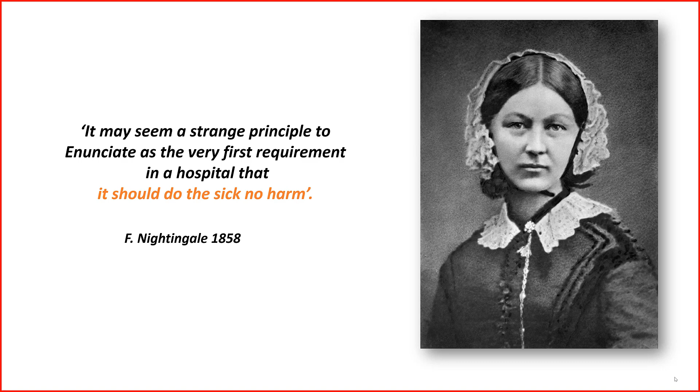Florence Nightingale is credited as being the first person to make the link between the hospital built environment and patient ill health. What she said so eloquently more than 160 years ago is still true today, unfortunately. Within days of opening of a new hospital, patients die from avoidable infections from the built environment.

It might be reassuring to think that when you've got a brand new hospital, this is like a fortress. Or you may think that once you put a patient in an isolation room and the door is shut, they're not at risk of acquiring infections. But this is not the case. And the problem doesn't just begin elsewhere in the hospital. In fact, it begins several miles away, or even further, depending on local circumstances where the hospital is built.

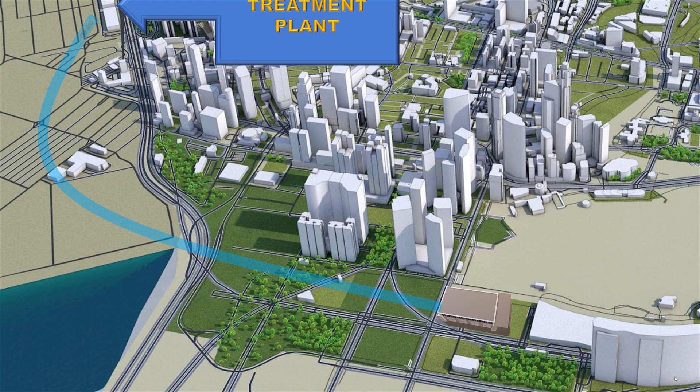Now, if we go to the water treatment plant, which may be the other side of a city, water is piped, normally through underground pipes, into buildings, and the water contains its own normal microbial flora. These are termed opportunistic premise plumbing pathogens. These organisms are capable of causing disease, especially if they multiply up to high numbers. But in immunocompromised patients, these organisms will cause infections.

Equally, patients, staff and visitors bring organisms into a building. The large bowel of humans contains more bacteria than there are people on the planet or cells in your body. And this is where some of the most highly antibiotic resistant organisms reside, in the human gut. So naturally, as people enter a hospital, they will bring their own microbial flora, which may contain highly resistant organisms, and these may then enter the systems in the hospital.

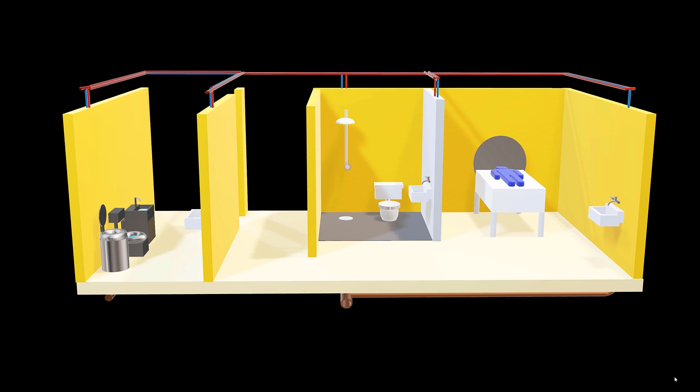So if we go back to outside the isolation room, if we look at the flooring and make this transparent and look underneath, we can see the pipework. This will include the hot and cold water systems, but also the wastewater systems. And these will bring microbes into the patient's room, which may produce infection. This talk primarily concerns the risks from wastewater systems. We've just overlaid on that the ward. So this is the water pipes, and underneath you can see the wastewater pipes.

The Victorians thought that disease was spread through the air, and because of this, they ordered the cesspits to empty into the Thames. Up to then, the Thames had been a relatively safe source of drinking water, and of course when the cesspits entered it, it became contaminated. As somebody wrote at the time, with the present system of London water supply, a portion of the inhabitants are made to consume a portion of their own excrement, and moreover to pay for the privilege.

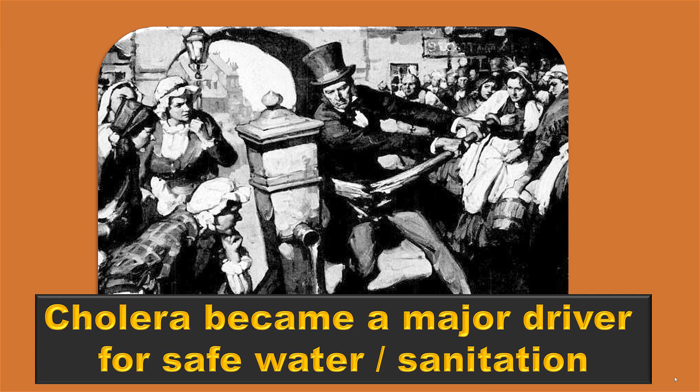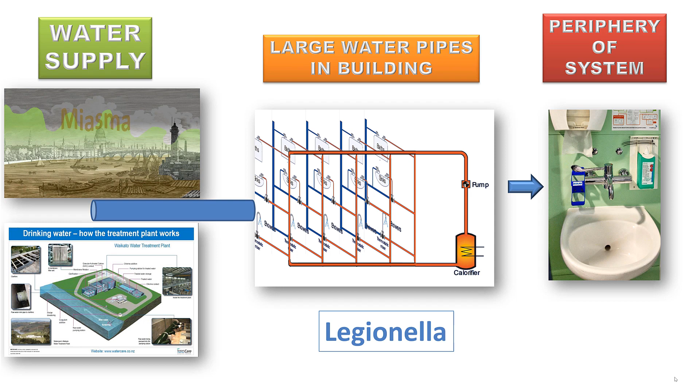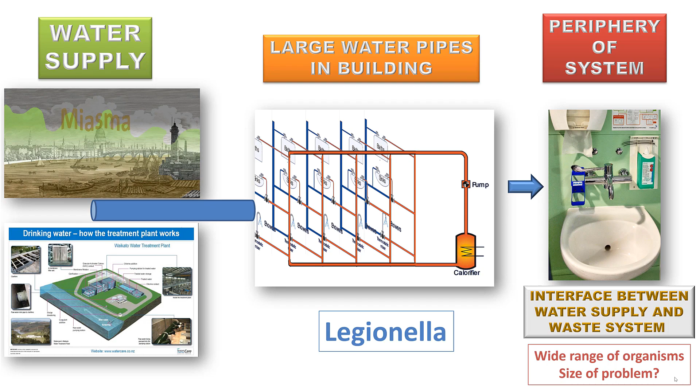So we've moved from fecally contaminated wastewater. We now have, in developed countries, we're lucky, high quality water. We pump that into buildings, and we learnt about Legionella. And we're now only beginning to recognise the risks from the periphery of the water system, which may be arbitrarily defined as the last 2 metres of pipework, connected devices and associated wastewater system. So this is an interface between the water and wastewater system, and there's a wide range of organisms, and I think we need to start thinking what the size of the problem is originating from the periphery.

The first area in the hospital to move to water-free care was not a patient area, but a sterile area, a sterile production area in pharmacy. This resulted because in 1995, total parenteral nutrition was prepared. It was given to paediatric patients, and they died from infection. This was traced back to splashing from a nearby sink getting into the TPN as it was made.

So the view from the sterile services in pharmacy is that water is so unsafe, you keep it out of the department. People decontaminate their hands before entering or use alcohol gel. If you look at most buildings, they are connected to the wastewater system. And if you were an alien and you wanted to sneak into people's houses and it was small enough, you could do it from the wastewater system.

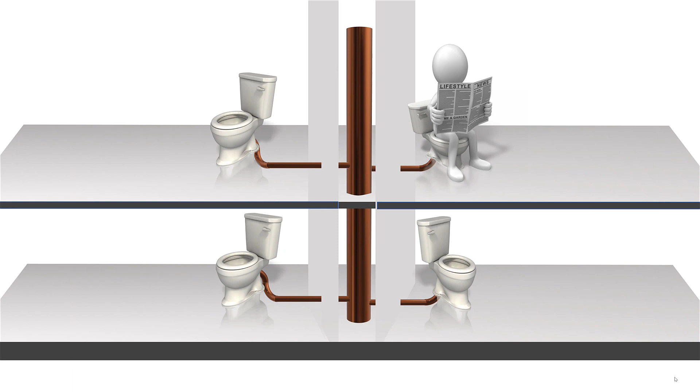But what we're going to concentrate on is the wastewater systems in hospitals. As we would expect, if we looked in the main sewage stack, we will find human feces and other body fluids. And as we've already stated, this is where some of the most highly antibiotic resistant organisms reside, which threaten the end of the antibiotic era.

So the question is, these are 4 patients in geographically distinct areas of the hospital. If one has a highly antibiotic resistant organism, how is it that it may be communicated to others in quite distinct areas? And could the answer be it is actually via the wastewater system?

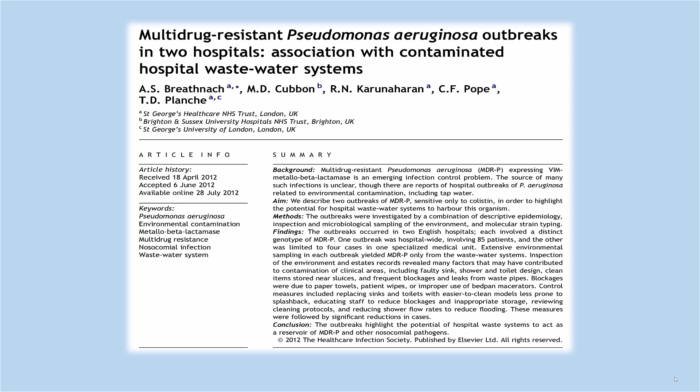So how do organisms move around wastewater systems? This is a wonderful paper that came out of St George's in 2012. It took 5 years to uncover the outbreak, and they showed that the wastewater system acted as a superhighway for the spread of highly antibiotic resistant organisms through a healthcare facility. These were emerging at blocked sinks, blocked showers, anywhere where drains were blocked or poorly constructed, 90-degree bends.

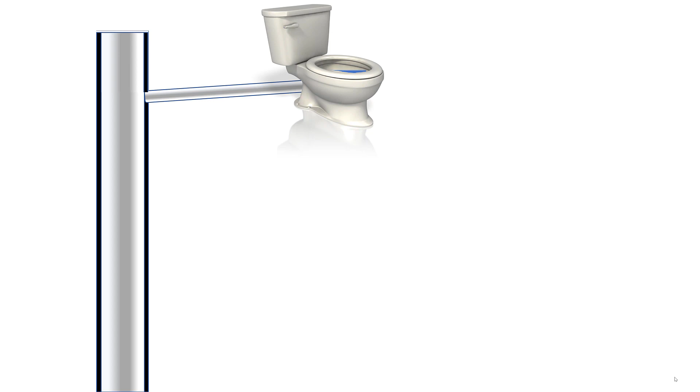So what happens when you flush a toilet? As you might expect, the water and feces enter the main sewage stack, and you expect them to fall by gravity towards the ground. This is the case, but as this falls, air has to escape, which creates an upward draft, which creates a suspension of water and fecal material, which can travel several stories up.

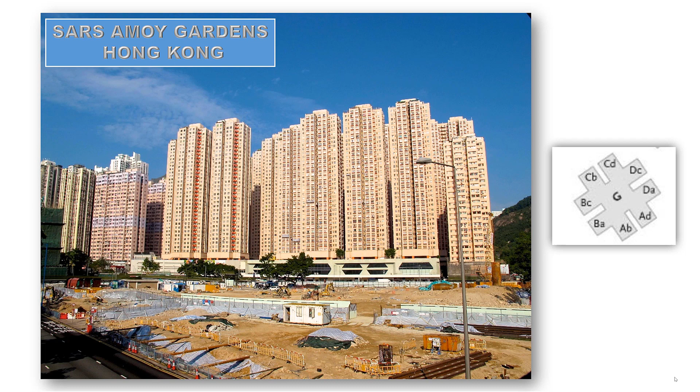The first clue to this came in the first outbreak of SARS. There was an immunocompromised patient, and these patients can shed the virus, still biologically active, in the stool for a prolonged period of time. They were living in these high-rise flats. There are several flats on the same floor, and you might have expected that if there was transmission in the building, it would be people on the same floor who would be using the same services, the lift. However, this was not the case. It spread vertically, and was thought to be via the wastewater systems.

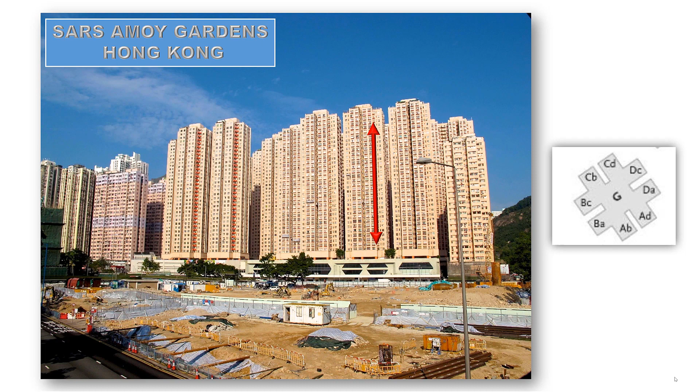So they did the equivalent of flushing the toilet, put the Pseudomonas putida in the stack, and they could show that the Pseudomonas putida could be detected several stories higher, either by air sampling or contact plates on the toilet, showing that these organisms can move up a vertical stack. And of course, within a building, all services are connected to the sewage stack, be they the kitchen sink, your bathroom sink, shower, or the toilet.

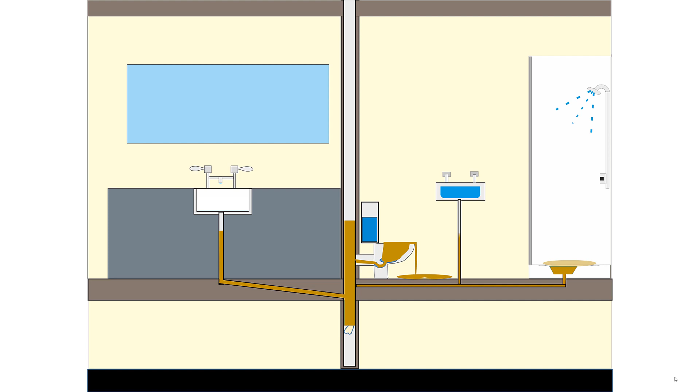Blockages in hospitals are common. Wipes are a common cause of these blockages. In some hospitals, more than 400 blockages a year. And when this happens, you can see how you can get back contamination, and you may see feces actually emerging in showers. But on top of this, we pour still biologically active antibiotics into the wastewater systems.

A recent study in Germany looked at the concentration of antibiotics in the waste traps of showers, sinks and toilets, and they found biologically active antibiotic. People do pass urine when they're in the shower. So they flushed the services out, which should have got rid of the antibiotic, and took the room out of action. What they found is that the antibiotics reaccumulated, and what they think was happening is that some of these antibiotics become incorporated into the matrix of the biofilm.

When you flush the water away, the concentration lowers, so these antibiotics now re-emerge out of the matrix. But it's not a great leap of faith to see how the microbes may now be using our own weapons against us. So by incorporating a broad spectrum antibiotic into the matrix of the biofilm, they now may apply a selective pressure, only allowing resistant organisms to enter the biofilm.

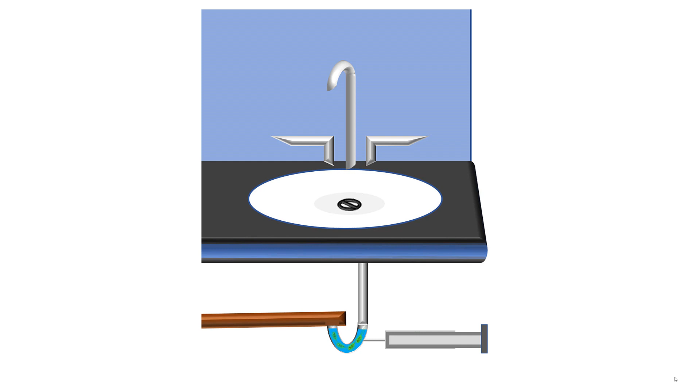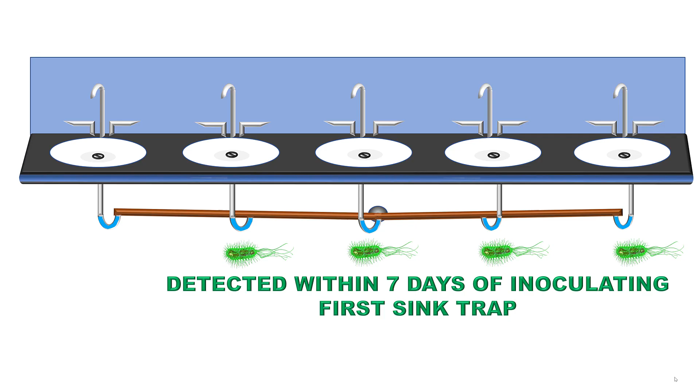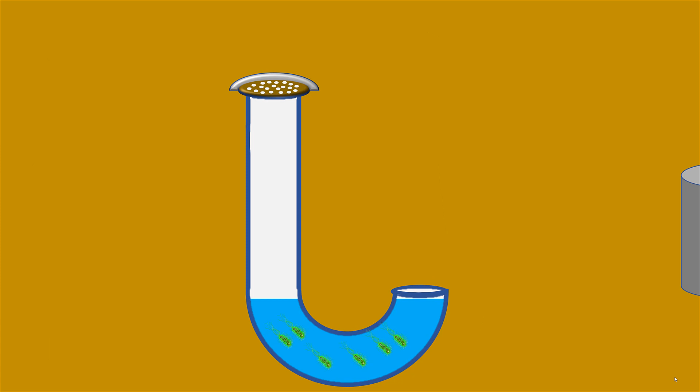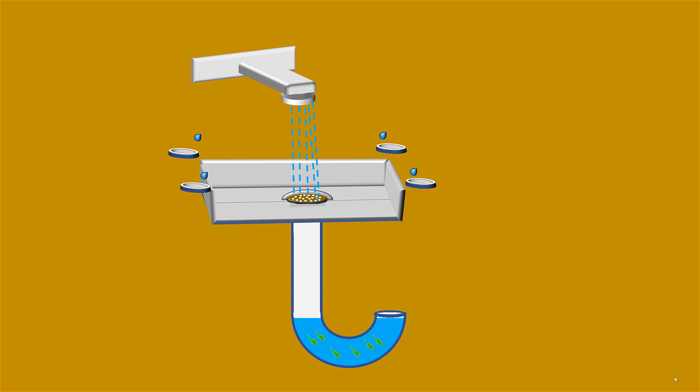So waste traps, their main function is they act as a water seal to prevent the escape of sewer gases, and these come in various forms, including here, a bottle trap. Again, the same group in America inoculated a waste trap with a bacterial culture. They then put this into a high-risk scenario. So this was a sink where water from the outlet was directly hitting the sieve. They put settle plates, bacterial agar plates, nearby, and they collected splashes, but they couldn't detect any bacteria.

But they then repeated the experiment and made one minor change, and this was to add a carbon source. And something quite remarkable happens when you add a carbon source. Bacteria in the form of biofilm now grow up the vertical section of the pipework at an incredible rate of 1 millimetre an hour. If you now put this waste trap into the same scenario and allow water to directly hit the drain, then on the agar plates nearby, the transfer of the organisms from splashes can now be detected.

So the learning from this is don't pour anything down the sink. It's a zoo down there, so don't feed the animals.

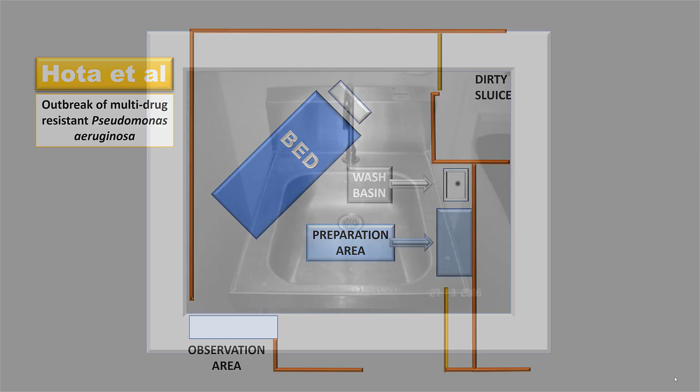Many of the outbreaks are from around water and wastewater with highly antibiotic resistant organisms. This is an outbreak from Canada, and this was a multi-drug resistant strain of Pseudomonas. And if we just go into the ITU, there's a door opening, and then you can see the wash basin and a work preparation area. And what they found is when they tested the water, this was free of the highly resistant strain, but it could be found in the drain.

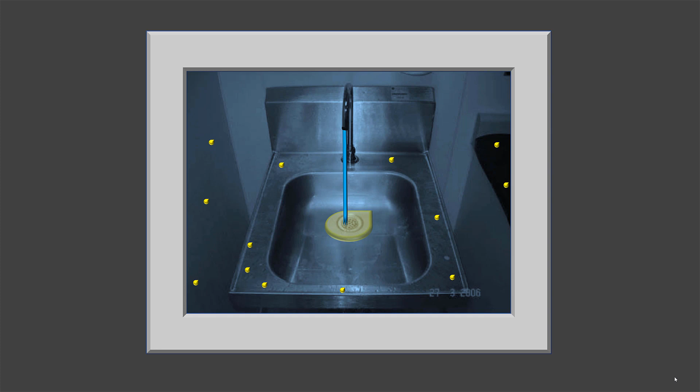So they did a very simple and elegant experiment. They put fluorescein dye into the drain, as shown. They then shone fluorescent light to make sure there wasn't any background fluorescence, and they then ran the outlet. And what they could find is splashes of fluorescein travelling at least a metre away. They couldn't exclude it going any further.

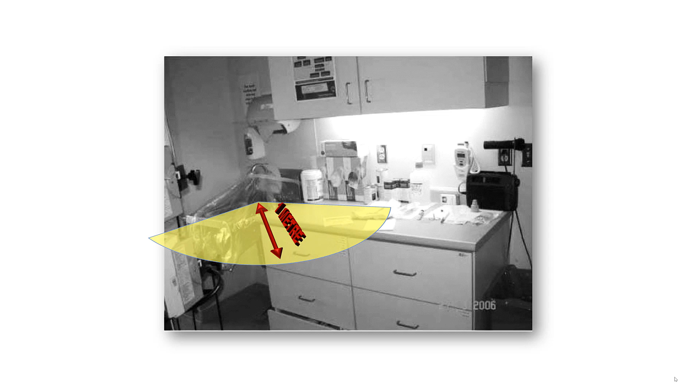We're now in the ITU room. You can see the sink's been taken out of action, and that's probably less than a metre there. We can now see how splashes of the organism would get into the preparation area and go from there to infect the patient.

So now when you look at a clinical hand wash station or any sink, what you're actually looking at is a rocket launcher. This is a piece of equipment which is capable of dispersing either organisms which come out of the outlet in the water, or that the water picks up from the wastewater system. And this might seem to be an exaggeration, but it isn't. Hand wash sinks used incorrectly, any sink, actually result in patients' infections and deaths.

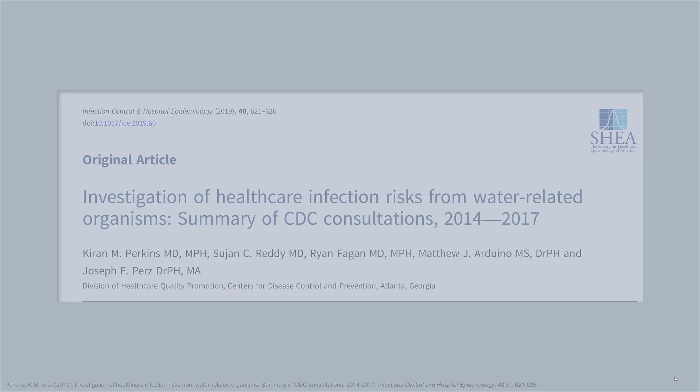This is a report from CDC in America. This is looking over 3 years. CDC are called in by hospitals when they need help in investigating an outbreak. And this is looking at water-related outbreaks, excluding Legionella. So they looked at direct or indirect contact with water, that could be introduced by drugs, looked at susceptible populations, and they included wastewater systems.

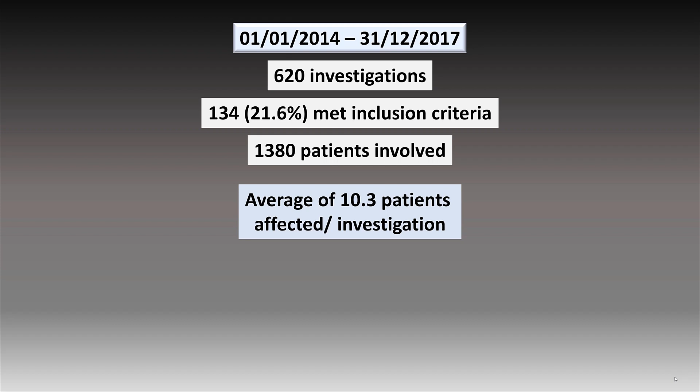So over that period of time there were 620 investigations, but water or wastewater accounted for more than a fifth of their requests for help. There were 1,380 patients involved, an average of 10.3 patients affected per investigation. Just to put this in comparison to Legionella, in England approximately 12 cases of hospital-acquired Legionella a year are detected.

7.5% of investigations were polymicrobial, and a third of infections were with multi-drug resistant organisms. And actually, if you look at the ones caused by Enterobacteriaceae and Pseudomonas, of those organisms, a much higher percentage were due to multi-drug resistant organisms, over 90%.

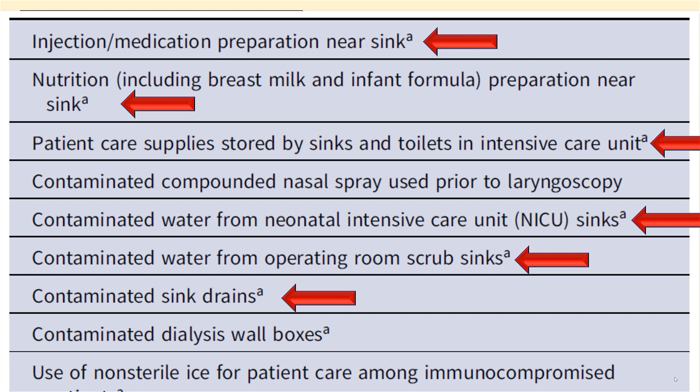And what they found is quite startling. They found that the infections were being transmitted due to preparation of medication near a sink, nutrition near a sink, patient care supplies stored by sinks and toilets in ITUs, contaminated water from sinks in neonatal units, and contaminated sink drains. Well, you might think, okay, that's America, how about the UK?

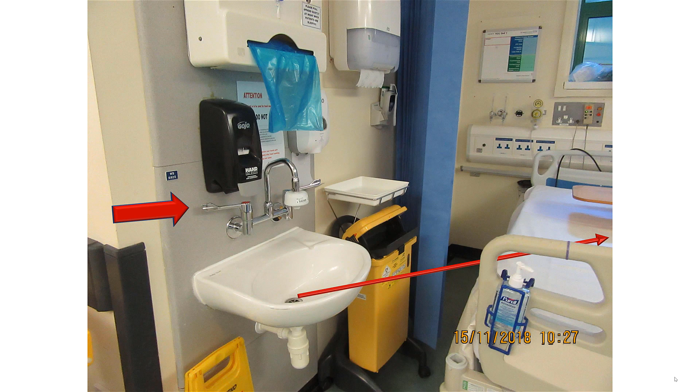So this is an HDU in England. People obviously concerned about the quality of the water there. You can see the elbow operated lever can't be operated because it is at the wrong angle and is also being blocked by the dispenser above. But this is a high-risk situation because water will be directly hitting that drain, and that's probably about a metre, so drain contents will easily be reaching this patient.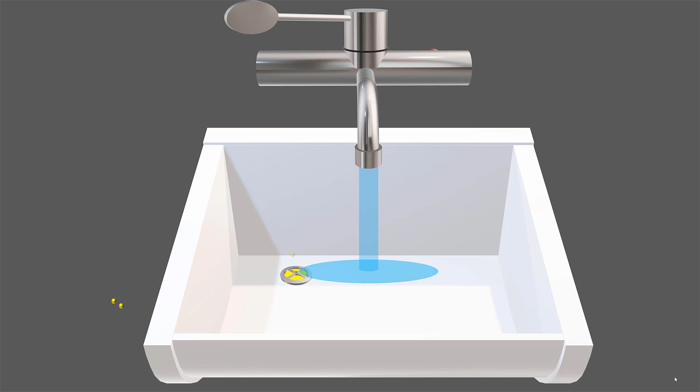So what about the hand wash station design? What happens if, instead of having the drain directly below the outlet, you move it to one side? This is one study from America which showed that even when you did that, you still got dispersal of drain contents. What we're not sure is whether it's water directly hitting the drain, or some of the drain contents come back into the flow of water, and this causes their dispersal.

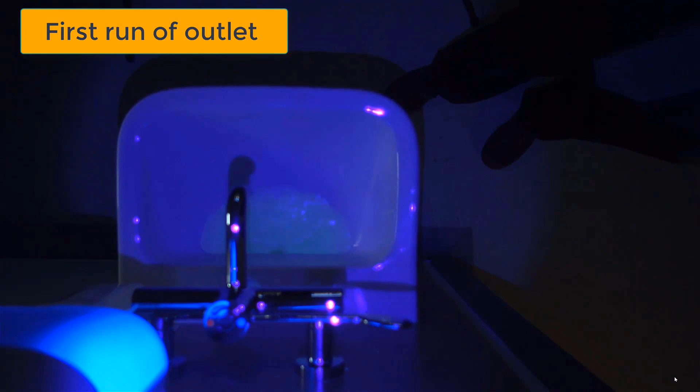In the UK, we prefer to have sinks with a rear drain, and work from Porton Down is showing these are very low risk, providing drainage is not obstructed. And as you can see here, the fluorescein dye which was put into the drain is now coming out. There's poor drainage in the sink, it's not working as well as it should be, and as you'll soon see, against flow there's regurgitation of drain contents. In fact, up to 9 times the running outlet, you can see fluorescein escape from the rear drain, and regurgitation of contents against the direction of water flow.

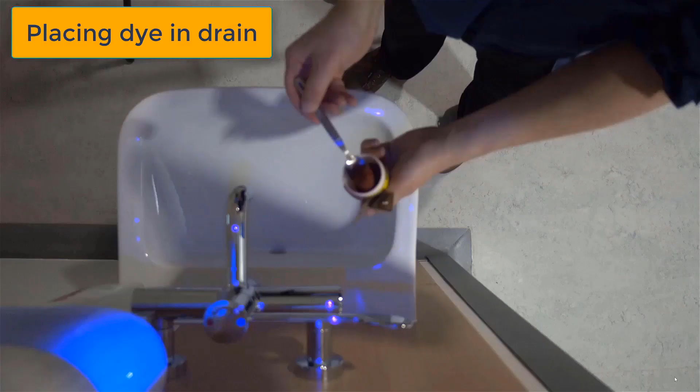And the reason we have problems with rear drains: all those items on the back of the sink were found down in the waste trap causing obstruction to flow. And it's because this is the sieve which has been designed for a rear drain, and people, I think rightly, don't want to use this because this is a high risk surface for biofilm formation and likely to lead to issues. So this is the Achilles heel of the rear drain: as soon as you get impairment of flow, it starts dispersing wastewater.

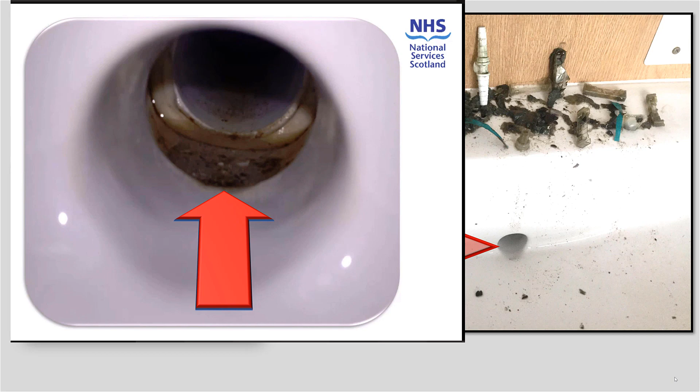This was another issue with the rear drain. This is looking from inside the sink, and as you can see here, the rear pipe has had overzealous use of sealant. So what this has caused is a dam leading to impaired drainage and biofilm, and this was responsible for transmission events to patients.

So, impairment of drainage of rear drains: anything going down there is likely to impede the flow because it doesn't take much to block the waste trap.

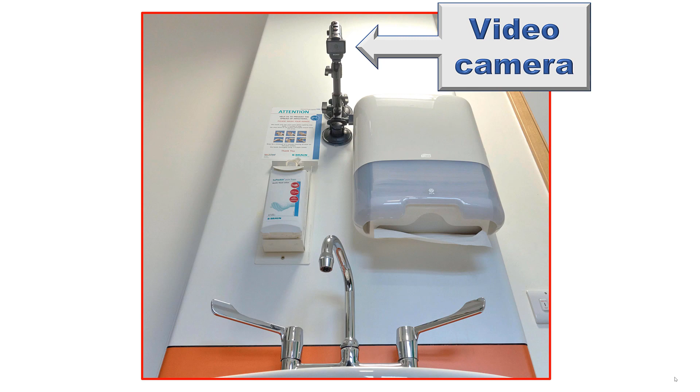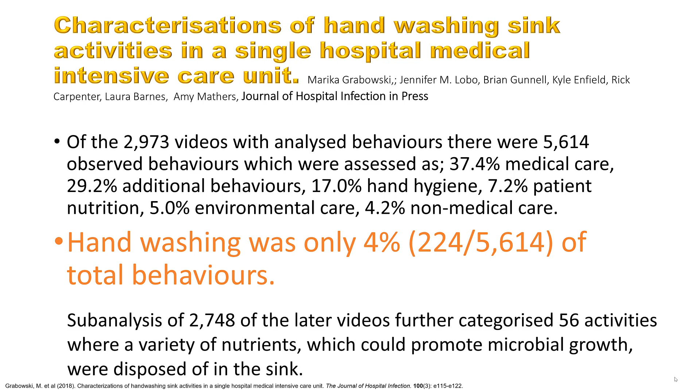So what about staff discipline, or I might say indiscipline? This was a study, again coming from the United States. They put a video camera above a sink so they could see what was happening, but couldn't recognise individuals. They looked at more than 5,500 behaviours, and the headline figure is that hand washing was only 4% of total behaviours. So 1 in 25 visits to the sink was for the correct purpose, or to put it another way around, 96 out of every 100 visits were for the wrong purpose.

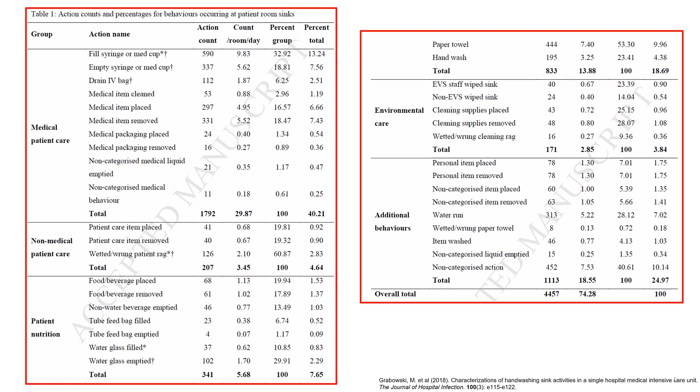And the sink was used for disposal of fluids, it was used as a shelf, you name it, it was done. And what they summed up by saying is that redesigning hospital workflow and sink usage may be necessary, as sink drains as a reservoir for transmission of multi-drug resistant bacteria are increasingly realised. And I think the only part of that sentence one might quibble with is the multi-drug resistant, and we'll explain this later on.

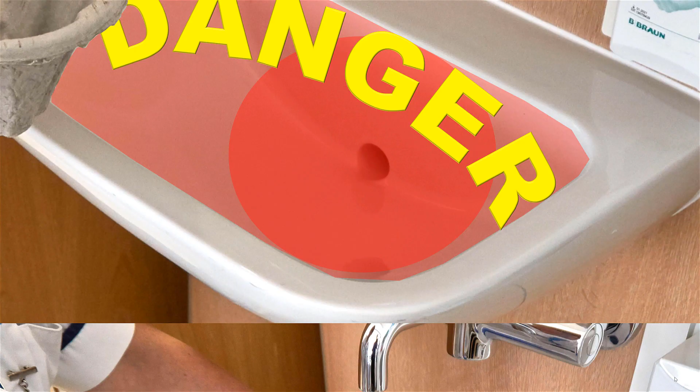So we recognise that this is a high risk area. We're very quick to recognise the risk that cleaning staff, domestic staff, may clean a drain and then spread organisms to the outlet and other areas. But we're only learning about other groups, how contamination may occur. So here, somebody just taking a cloth to go and wipe a patient's face, by putting it down there, is highly likely to pick up drain organisms.

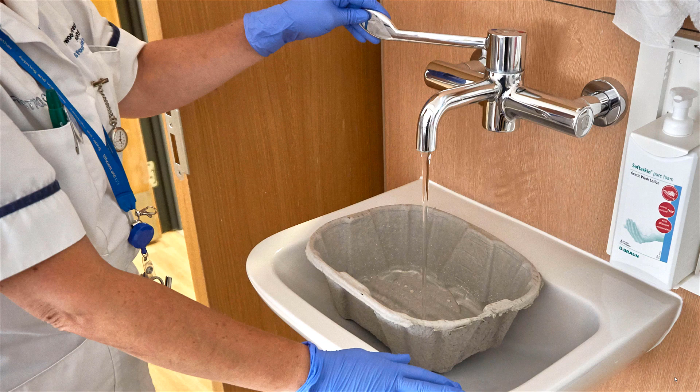But again, we take it for granted. We have a nice clean bowl here, disposable, fill it with water to wash a patient, but the bottom of this bowl is coming in contact with the wastewater system. And just to show, this is a nice paper from Ashley Flores, a DIPC at King's College Hospital, and here they had a number, I think they've had more than one outbreak, and they think this has been linked to these wash bowls spreading CPEs from the sinks, and they've moved to water-free patient care for bathing.

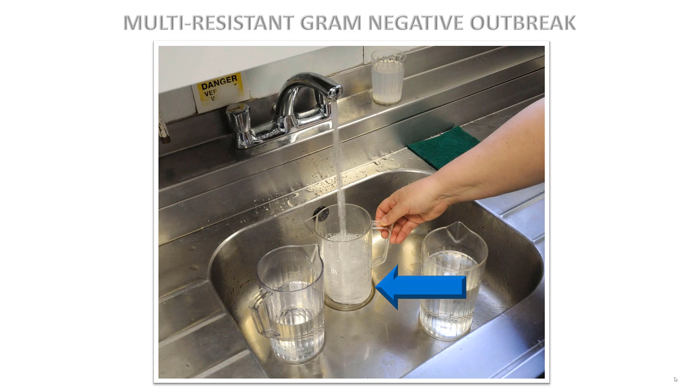Also, when taking jugs of water for a patient, what happens is the domestic staff, to save time and its weight, will place this in the sink, and again the bottom of these jugs is thought to be acting as a vehicle for the transmission of wastewater organisms to patients.

So we also need to consider the chances of our interventions. If we are going to introduce them, what is the chance of them being successful? So this is actually a representation of the design of a real ITU, and one of the side rooms is at the top. If somebody's in isolation in a medical ward, there's a good chance that the side room will have ensuite facilities, so you can dispose of body fluids within the room.

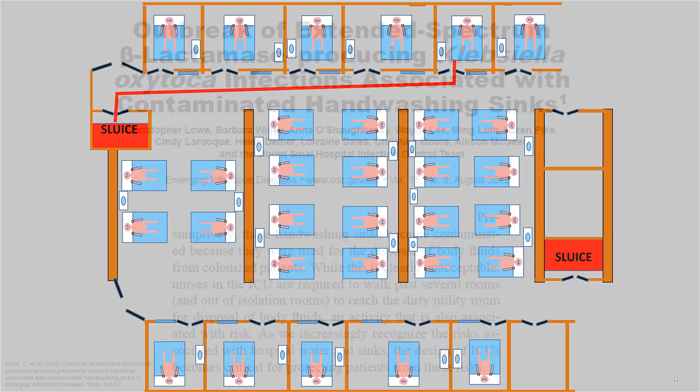But what we expect staff to do in an ITU is to walk the length of the unit with some of the most highly contaminated secretions, which is a risk in itself, touching a number of surfaces, and also the way this is disposed. And it's not surprising, again, this is a report from Canada. This was a spread of Klebsiella from wastewater systems, and they say whilst it's clearly unacceptable for staff to dispose of such secretions in hand wash stations, the reality is this is going to happen unless we design it out of the system.

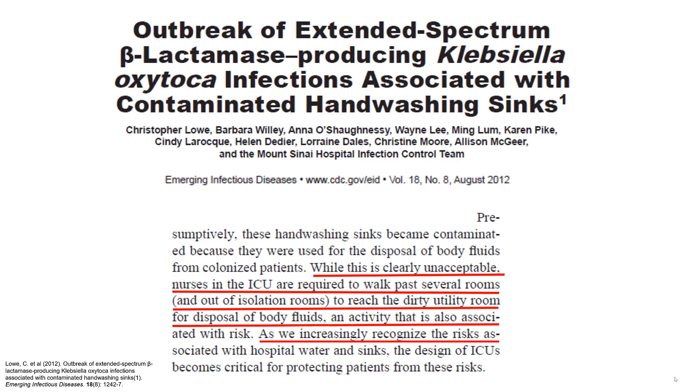Here in France, this is looking at a number of ICUs, and there's 133 single rooms in 13 ICUs, but 52 of the rooms had 2 sinks, and the purpose of the second sink was so you could dispose of fluids in the room. And so 3 conditions were significantly associated with a lower ESBL sink contamination rate of the hand wash sink: firstly use of a sink restricted to hand washing, secondly using bleach as opposed to a QAC, and daily use of bleach for disinfection.

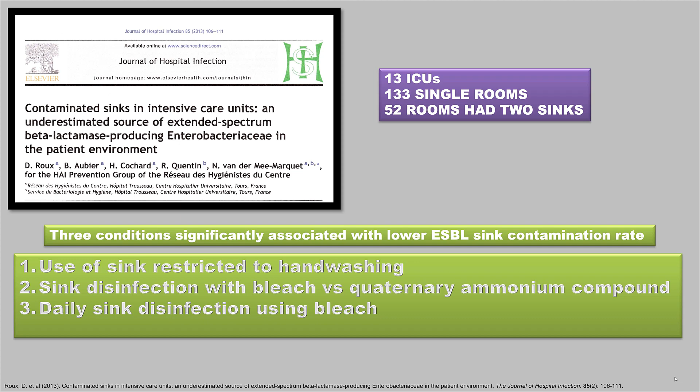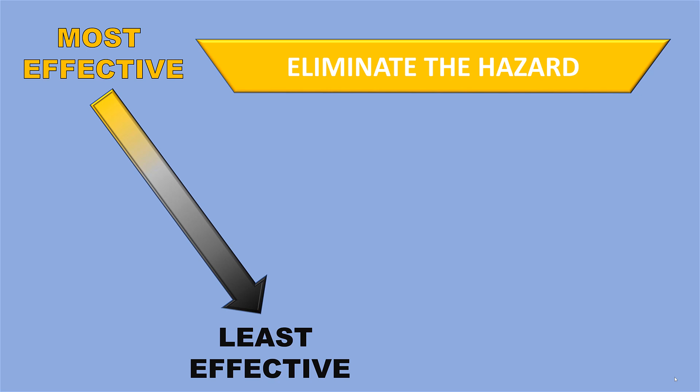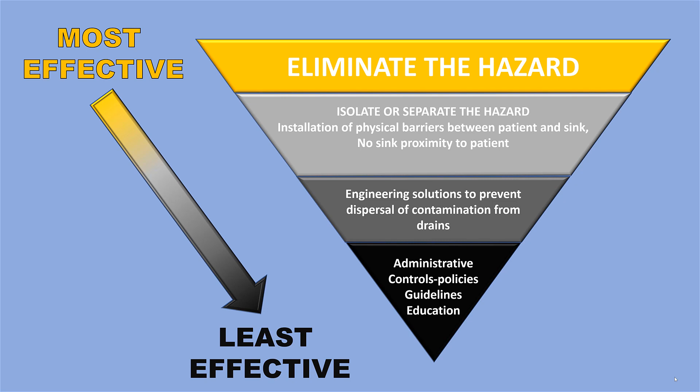So we need to think, if we expect people to use clinical hand wash stations properly, how do they dispose of fluids? Simply. So in terms of most effective and least effective, there is a hierarchy of controls, and the most effective is to eliminate the hazard, so that may be removing the sink. The second, isolate or separate the hazard. This could be putting a splash screen in, the engineering solutions to prevent dispersal, maybe offsetting the drain, lowering the pressure. But the most important bit of this is administrative controls, policies, guidelines, education, which we rely on most of the time. This is the least effective intervention.

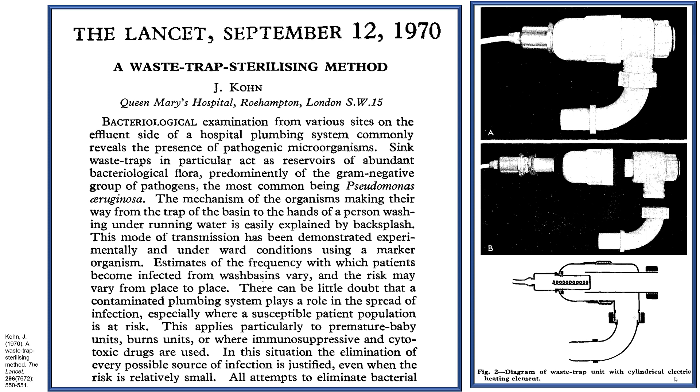In terms of lowering the risk from wastewater systems, Joachim Kohn warned the world of the risk of Pseudomonas coming from water systems, but in the UK we chose to ignore his comments in 1970. He also invented the first thermally disinfecting waste trap, because he said a lot of these organisms were coming from the drains, but people never really took this on. But now people are re-looking at thermally disinfecting waste traps.

So people have tried pouring disinfectants into wastewater systems, and they've met varying success. Sometimes it works, sometimes it doesn't work. There's a worry about the contact time with the vertical section, so some people have produced foaming products. And the thing is, even if they do work and you stop using them, the organisms are likely to regrow from the main sewer. In fact, in some hospitals they've replumbed systems, which has brought temporary respite, but even when you replumb the system, eventually the organisms come back from the main sewer to produce transmission events to patients again.

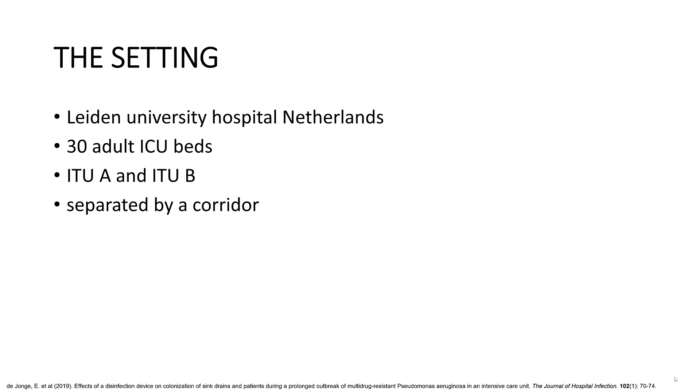So this is now looking at thermally disinfecting waste traps. This is a very nice report. In fact, it's two reports on the same outbreak which came out of Holland. So they thought they were on top of it in 2013, but they weren't, and they had to do subsequent interventions. So just to give some background, this is Leiden University Hospital. It's 30 adult ICU beds, and there's ITU-A and ITU-B, and they're separated by a corridor, so they have quite a strong relationship with each other.

And what they found in the outbreak is they were finding parts of the environment positive, they were finding drains positive, but they weren't sure what the drains represented, because of course if you have it in patients and put their secretions there, you're going to find it in the drains. But they also found it in faucet aerators, which they found more worrying, understandably, because now the water is contaminated.

So this is when the outbreak was first noticed, and they did a very good thing. They looked back in time, and when they looked back in time, they actually found two strains going around. This outbreak had been going on for 21 months, but nobody realised, because lots of people were involved and people were only getting a snapshot, they weren't seeing the overall picture. So this has implications for infection control surveillance. You need to look for these things over a prolonged period of time.

And you can see here, this is the outbreak now, continuing. So they tried chlorination of sinks, which didn't really get rid of it. But then they removed the faucet aerators and introduced a maintenance program. And so in May 2012, they had no new cases for 3 months, and thought they were on top of it. Unfortunately, 7 months after the last case had occurred, they had another 4 patients. But again, they got on top of this. But even since then, they'd been getting sporadic cases.

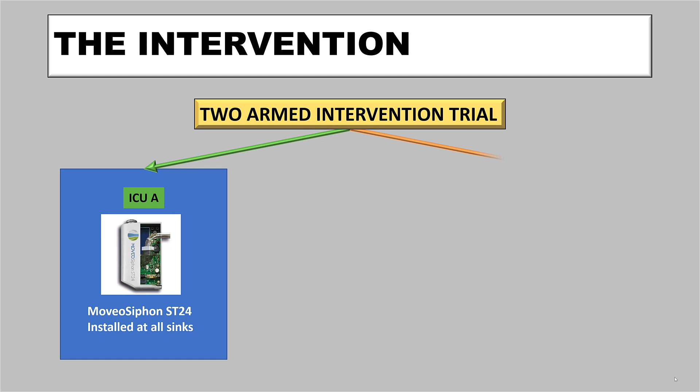So they hadn't found a common source, so they'd tightened up on all the standard infection control precautions, and now they decided to focus on the sink drains. And this was a 2-armed intervention trial. On ITU-A, they put in this thermally disinfecting waste trap, and this operates by detecting water running into the waste trap. This uses agitation, and it goes through several thermal disinfection cycles. But on ITU-B, what they did was they put in new wastewater traps going from the sink to the drains.

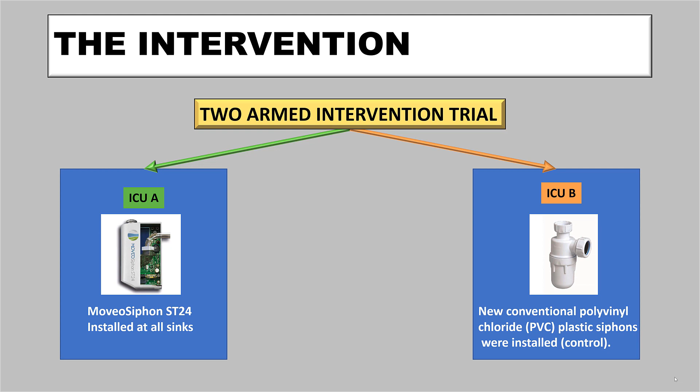And so this is quite a busy chart. At the top, the triangles represent patients acquiring the organism. Green is ITU-A, orange is ITU-B. The hollow squares here are the numbers of bloodstream infections. And here, this is showing the percentage of wastewater traps contaminated. Now, nothing here doesn't mean they didn't detect anything. It was that they didn't do any sampling, because every time they did sampling, they detected the outbreak strains in the drains.

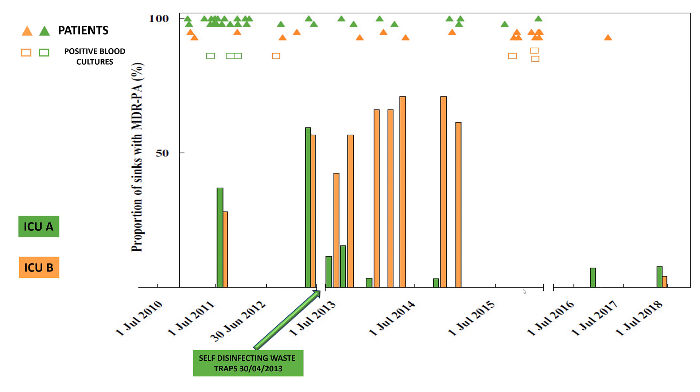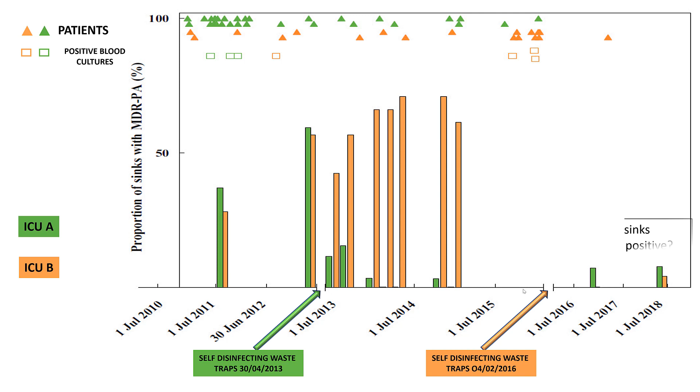And here you can see the introduction of the self-disinfecting waste traps on ITU-A, and you can see it dropped off quite nicely. And then they moved the self-disinfecting waste traps to ITU-B. So one of the questions is, why are some sinks still testing positive?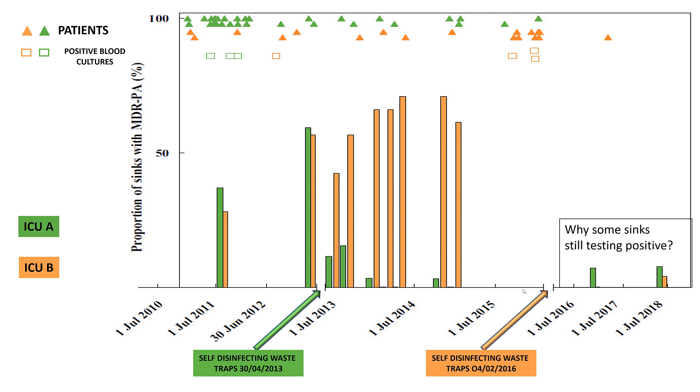And what they found is these sinks were not being used, and as the thermally disinfecting waste trap is only activated by water running into it, it wouldn't go through a thermal disinfection cycle. And the second thing is, why did installation of disinfecting waste traps on B affect patients on A? And they think it's because the 2 ITUs were in such close proximity, there was movement of contaminated equipment across

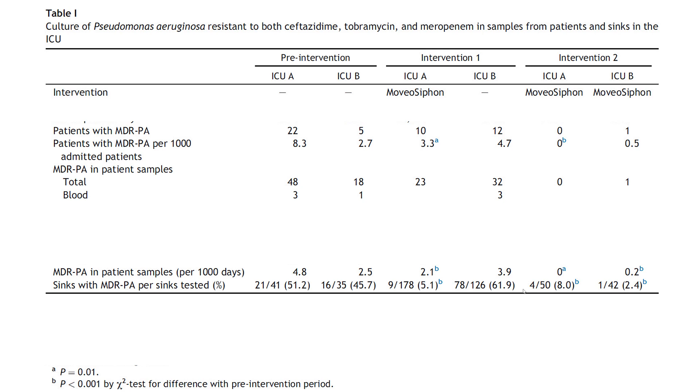both sides. And for those of you who want to see the statistical significance, you can see it's statistically significant introduction of the waste trap on ICU-A and also on ICU-B.

So we'll just briefly look at showers, toilets and kitchens. This is a recently reported outbreak from Germany. This was carbapenemase producing Enterobacteriaceae. They could show the patients having the showers were acquiring the organism. They tested the water was clear. They could detect it in the drains. They put disinfectant down the drains, and although this made the environmental swabs negative, they were still getting ongoing transmission.

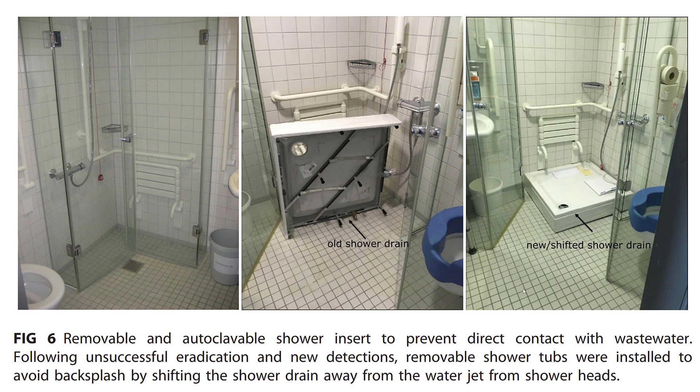They put some plates around the shower, and they could show dispersal of CPE when the shower was run. So what they did is they built this plinth, they put this on top, and this did two things. It stopped the patient having direct contact with the drain, and it seems ridiculous that we build drains for people to stand on, which are linked to the toilet. And secondly, it stopped water directly hitting the drain and dispersing organisms. And by placing this in there, occasionally they take it out to disinfect it, they successfully terminated the outbreak.

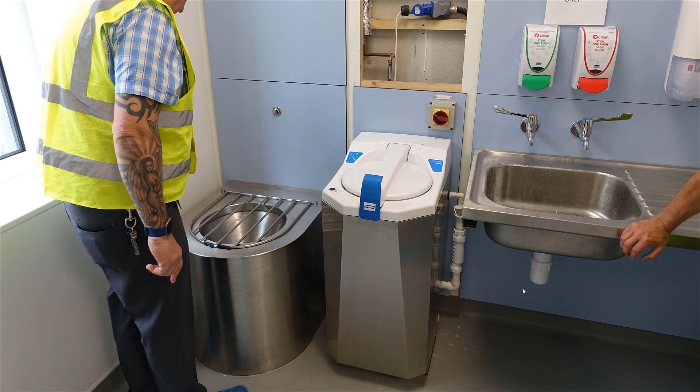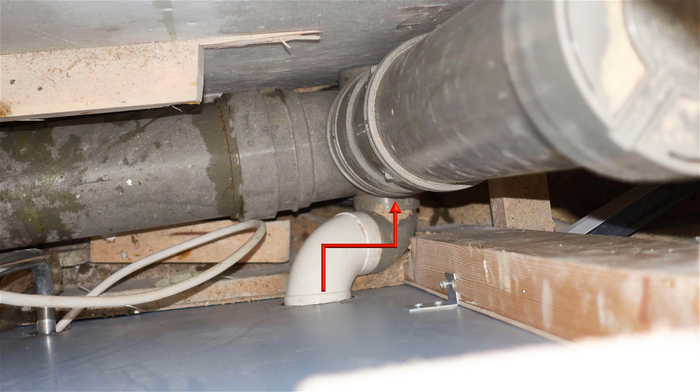This is a new hospital about to open, a very good estates team. You can see the macerator there, and they said they wanted the waste pipe from the macerator to be straight, go into the main waste pipe. They didn't want any 90-degree bends, and what you can see here is the contractors put two 90-degree bends, likely lead to blockages throughout the lifetime of the building because of this poor design of the wastewater system.

If we move to kitchens, this is from Germany. This hospital had its own strain of CPE, and it used to rear its head every month or every other month. And then suddenly the number of cases increased substantially. They did a case-controlled study, and they were able to show that acquisition of the organism was linked to eating salads. They tested the salads coming into the hospital.

They were free of CPEs, and so they went to look at the kitchens, and what they found was prepared salads were put on a surface near a sink, and what they were able to demonstrate is that water directly hitting the drain in the kitchen sink led to dispersal of the carbapenemase producing organisms, which then landed on the salads, which were a vehicle for transmission to patients.

But this wasn't the end of the story, because the kitchen was in a separate building. So the question was, how did the hospital strain get into the kitchens? It could be via a variety of routes. You could argue maybe the underground wastewater system, sewers. But what they found, a more plausible explanation, was this coil, which had gone down the main sewage stack in the hospital. They had a blockage in the kitchen, and this same coil went into the kitchen sink, and they think this is how the organism was introduced, and swabbing this isolated the outbreak strain.

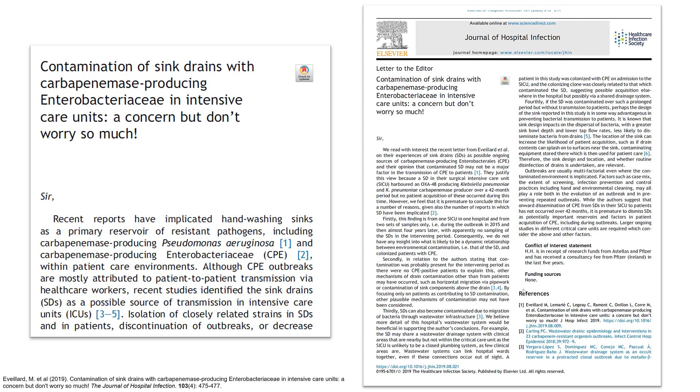And it's very good to see Hilary Humphreys' team go back and explain why this is naive. A, they didn't think their surveillance was good, but there's so much variation between practices, designs of sinks, where they're placed, how people use them, that extrapolating from one situation to everything else does not make sense.

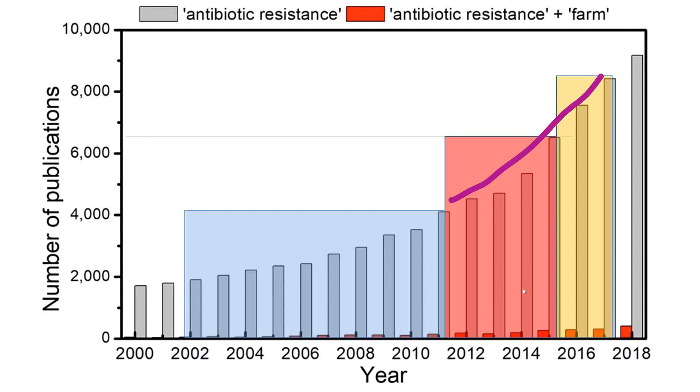This is the reports of antibiotic resistance in the literature, and this shows you the time it takes for them to double, how it's halving. So from 2002 to 2010, it took about 10 years, for the same number of publications, about 4 or 5 years, and then 2016, just a couple of years. But reports of AMR drain-related outbreaks have paralleled these reports in the literature.

And in Holland, in response to an intractable outbreak of a highly resistant organism, Joost Hopman and team there, they removed water services.

And not only did this get rid of the outbreak strain, this was successful, what this did was it produced an overall reduction in all gram-negatives. So going back to say why people only talked about highly resistant organisms, and it was slightly wrong, what this is demonstrating is highly antibiotic resistant organisms we don't think have any special adaptation to spread from water systems.

What they do is they attract our attention. This, if you like cars, is like a Porsche going down the high street in the brightest colour, blowing its horn, whereas the sensitive organisms blend into the background and we don't recognise transmission events due to these.

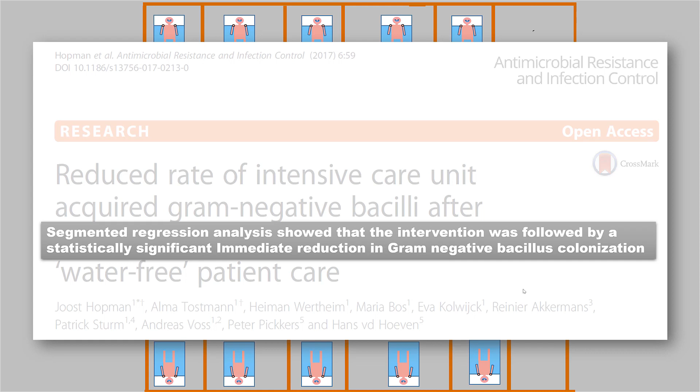The cost to society will be more than $100 trillion, which is about $12,000 to $13,000 per head of population. And there will be, year on year, 10 million extra deaths due to antimicrobial resistance. And it's a very good report, but one area where it wasn't quite right is the second recommendation, that some in the developing world will need to focus on improving the basics first by expanding access to clean water

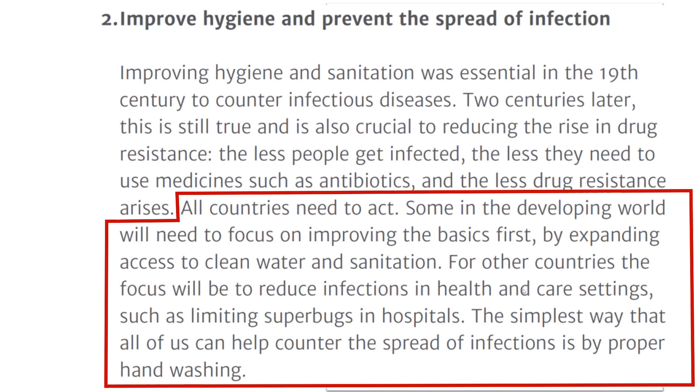and sanitation. What is happening is, in the most sophisticated healthcare facilities in the world, patients are receiving, in essence, fecally contaminated water because they're getting organisms that are being transmitted in water from the wastewater systems to these patients, causing infections. So in the UK, if you look at Manchester, this has been a source for more than 10 years of CPEs into the environment.

And this is where, as we talked about right at the beginning, the recognition of the risk from drains. But I suppose one of the questions we could say is, although we recognise the CPEs, prior to that, other organisms would have been dispersed from these wastewater systems because we don't think anything's changed, but our surveillance does not pick this up.

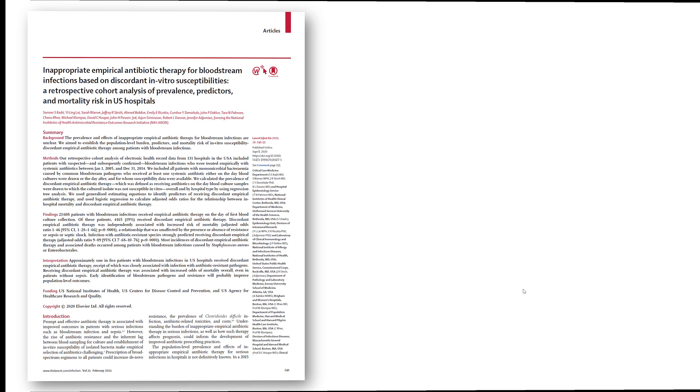And what is the effect of antimicrobial resistance? Well, it's already having an effect. This is a study from America, a multi-center study, looking at patients with bloodstream infections and whether they are on effective empirical therapy or not. And what it found was that roughly 1 in 5 patients with bloodstream infection in the US received discordant empirical therapy, which means that if you looked at the laboratory result, it wasn't active against the organism.

Receiving ineffective empirical therapy was associated with increased odds of mortality, even in patients without sepsis. So we're not measuring this, but the gap between effective empirical therapy and ineffective therapy, as antimicrobial resistance spreads, is going to get bigger, but this is already causing damage in healthcare facilities throughout the world.

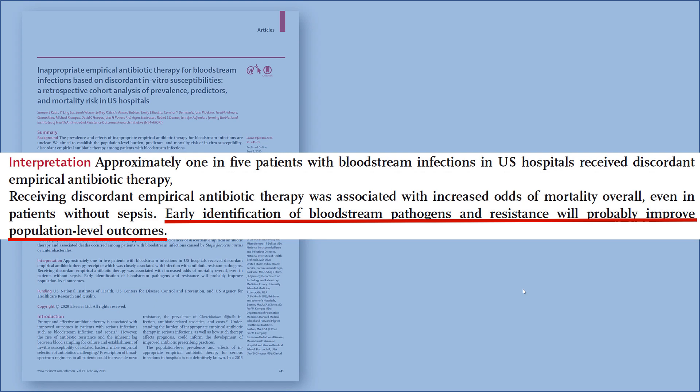And they say that early identification of bloodstream pathogens and resistance is likely to produce a population level improvement in outcomes. And this is not surprising, because at the moment, in most people's blood culture pathways, the avoidable delays are not measured in minutes or hours, they're measured in days. And if we improve this, not only will we improve the outcomes for patients, we will also help preserve antibiotics for the future and get patients out of hospital quicker.

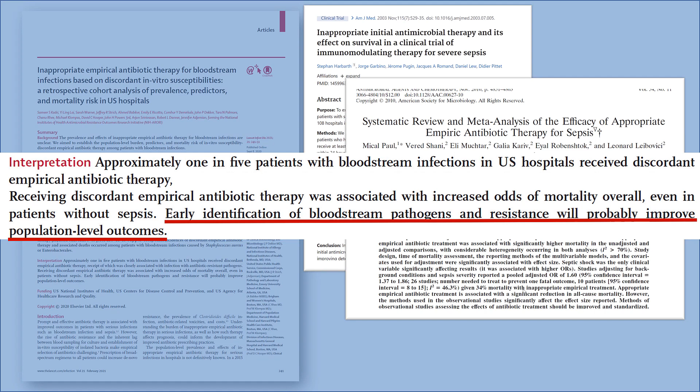And these are other papers which again verify this. If you're on ineffective empirical therapy, your outcomes are much poorer. So, next time you go to the toilet, you need to consider, are you letting go of a boomerang? And while this may appear humorous, there is truth to this, we have to recognise that patients are dying from contaminated water and wastewater systems.

And the first thing is the impact of construction activity on waterborne disease is preventable, and it should no longer be considered incidental or accidental. And this changing culture needs to be applied to the wastewater systems in hospitals, the way we deliver blood culture services and many other things, because this is just a change in mindset. We need to know that most of these things are preventable, and there are simple interventions which can prevent the spread of infection and antimicrobial resistance.